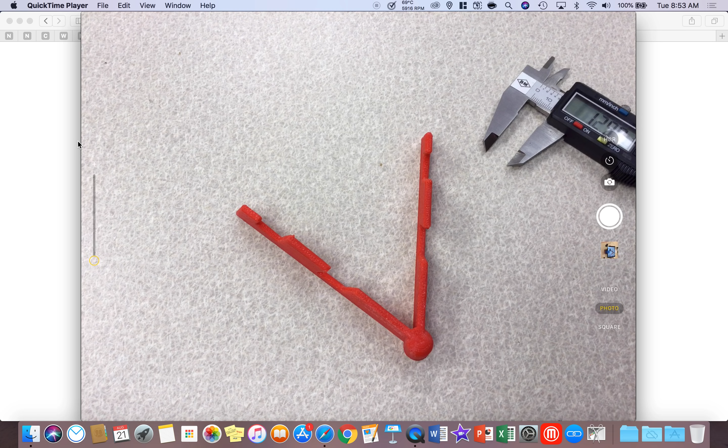Hello students, I'm going to give you a little bit of hint today on how to finish this project. So you and your partner are going to learn how to measure with the digital calipers and also how to draw your cell phone stand, to the point where I'm going to leave you about halfway through the project.

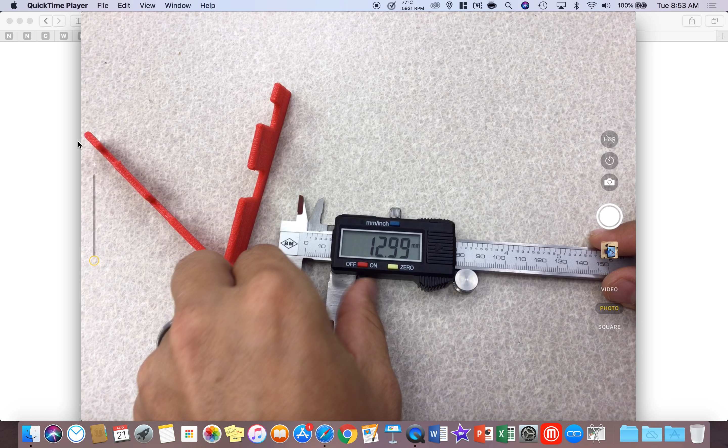The first thing you need to do is make sure your digital calipers are zeroed. If you don't see 0.00 or 0.01 when you squeeze on the jaws, then you're definitely not going to measure correctly because everything you measure will be off. Also, make sure you're not in inches and make sure you're in millimeters. So again, make sure you're zeroed and you're in the correct measurement.

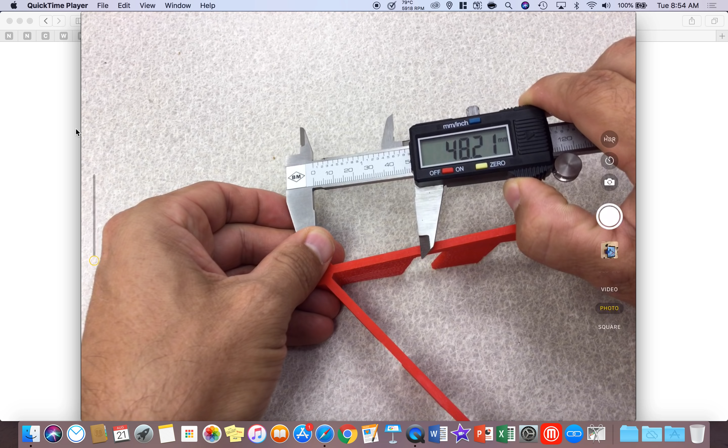Your first step is to figure out what is the length from here to this end point down here. So what we're going to do is flip it over and measure with the calipers. I'm going to put the calipers right here in the center of the cylinder. Here we go, and I'm going to hold it. Now this is where your partner could help you. I'm going to come out a little bit more, and it looks like 115 millimeters. So we now know both arms are 115 millimeters.

All right, next thing we need to know is what's the distance from here to here. So I'm going to gently push the top teeth in, and you can see that it's probably 105 millimeters. So that's good to know.

Last thing we need to know is how thick this is. So I'm going to pull in the inside jaws, and I think 3.75 is a good number to go with. So now in Onshape, what we're going to do is sign in.

Now I'm signed into Onshape. I'm going to go create a new document. Call this cell phone stand project, and then your name, and I'm going to hit enter. Cell phone project, here we go. Let me do something really quick since it grayed out. All right, there we go.

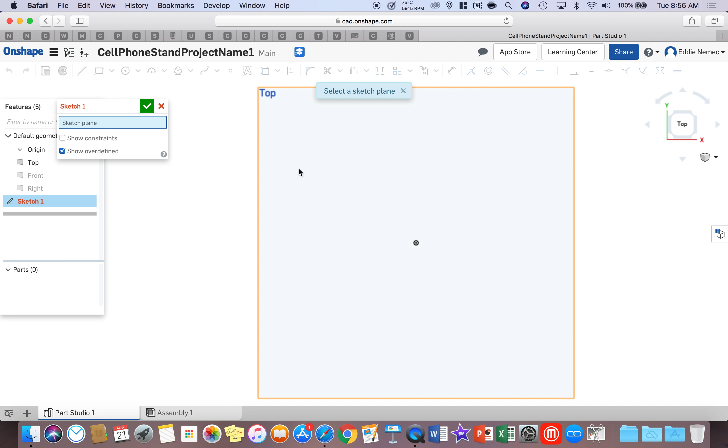Now immediately go to the top of the cube and left click on the top, and then bring your mouse over to where it says front. What you're going to want to do is left click on the eyeball on front and left click on the eyeball on right. That will now make you only have one plane to look at, and it's easier. I'm going to left click on the top plane. You're going to left click on sketch, bring your mouse inside the top plane and left click. You should see sketch 1.

So we know the arm is 115 millimeters. We're going to take a line tool and left click on the origin when we see that this is tangent to the origin. Left click, then bring your mouse down and left click. Now we have a problem.

This is in inches. So you need to go back to the 3 lines in the top, change your workspace units to millimeters. You're going to left click on inches, left click on millimeters, and hit check.

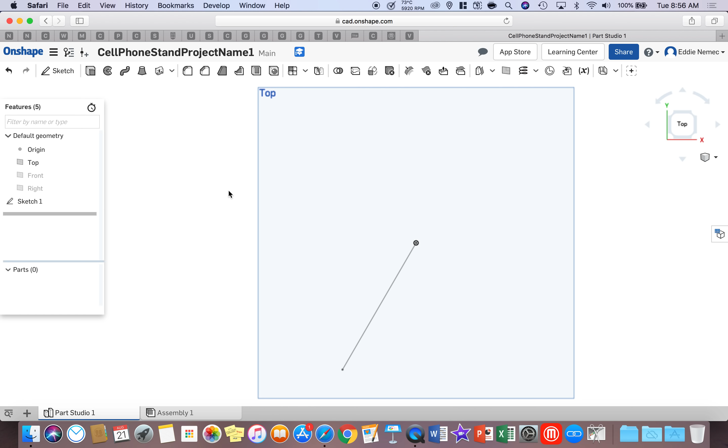Now anytime you want to work back on this sketch, go over to the menu, right click, and say edit. Now we're back in the edit mode. You're going to left click on dimension, left click on the line, bring your mouse out to the left and left click. Type in the number 115 and hit enter. So now we have 115.

Now what we're going to do is come back to our line tool, left click on it, it should be gray, left click on the origin when we see the tangent symbol, and bring our mouse out to the right and click. Immediately type 115 and hit enter without touching another button.

Now what we're going to do is right click escape line, and in order to keep these lines where they are and not have everything shift, I'm going to draw another line in the middle. I'm going to left click and come down, making sure I have a straight line, and left click. I'm going to right click escape.

I'm going to go to the dimension tool and left click on the center line and left click on this arm, bring the mouse down and left click. I'm going to go ahead and type the number 30 and hit enter, and see it slightly move the arm out.

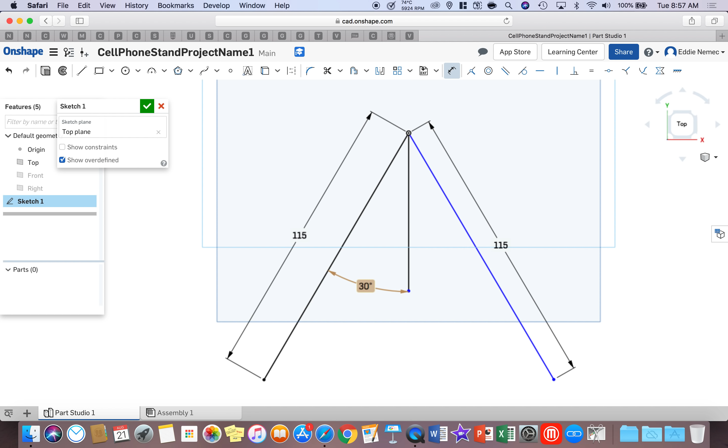All right, I'm going to do the same thing here. I'm going to left click on the center line, left click on the outside line, bring down my degrees and left click, and type in 30 and hit enter.

Now you can see that I've got the arms adjusted. What we need to know is what is the distance currently from this dot to this dot. So I'm going to left click on this dot and left click on this dot and come down and left click. Then immediately bring your mouse up, right click and escape.

We do not ever want to touch that number. So we're going to come to the degrees and change it to 27 and hit enter. I'm at 104.418, so I'm very close to the 105 millimeter distance I measured earlier. So I'm going to go 27.15 and hit enter, and I'm very, very close to the 105.

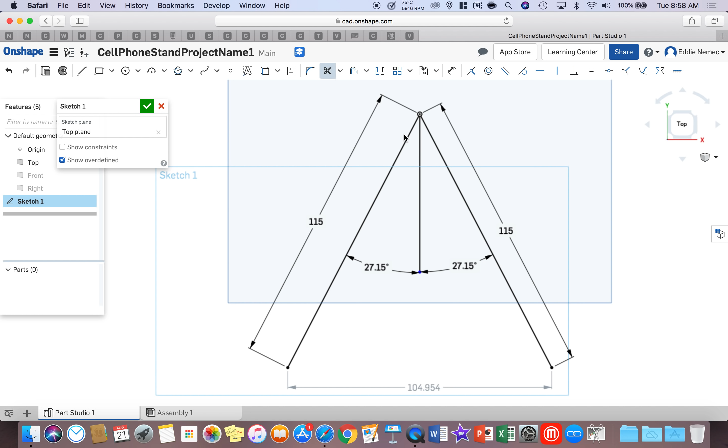I'm okay with that. Now what I'm going to do is I don't need this line anymore, so I'm going to go to the scissor tool, left click on it, and delete it. I'm going to right click escape.

Now I measured it with the calipers to be 3.75 millimeters thick. So all you have to do is go to your line tool, and right here on the dot, you're going to follow this line when you click. I'm going to left click and follow this line. Notice it shows you the right angle symbol - that means it's 90 degrees when you're right here. I'm going to left click and immediately type 3.75 and hit enter. Right click escape.

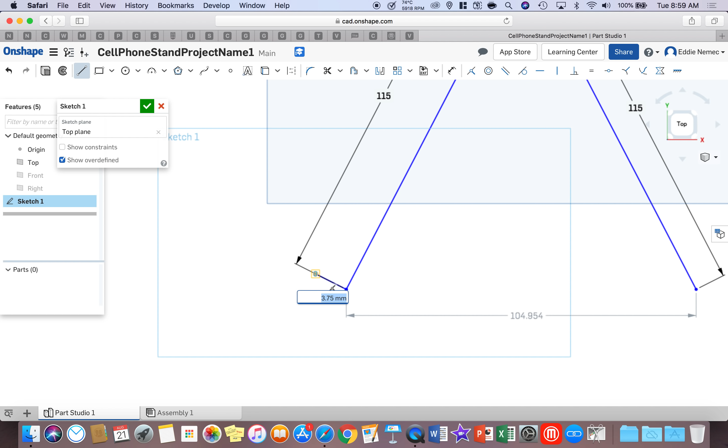I'm going to do the same thing on the other side. Left click on this dot, follow this line, left click and type 3.75, hit enter.

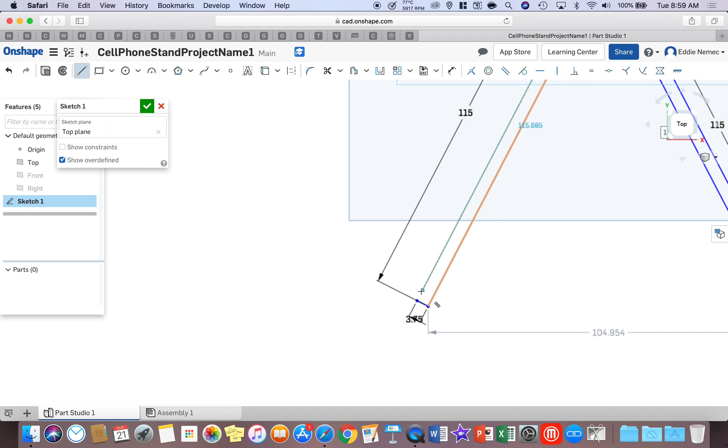Now stay in the line tool, make sure you are parallel. You see how it automatically highlights the line telling you are parallel? Keep that. Go all the way up until you see the dotted yellow lines that tell you are perfectly in line with the origin going straight up, and I'm going to left click. Then I'm just going to bring down my line and connect it with this endpoint and click. Now I have a solid shape.

I'm going to right click, escape the line, and go extrude in the top left corner.

Now I need to determine the height of the cell phone stand. So I'm going to go back here and take a look at the camera. Find the highest point, which is right here. You need to measure what the height is from here to here. So all I'm going to do is take the calipers, move them out, and it looks like 32 millimeters is a good number to go with.

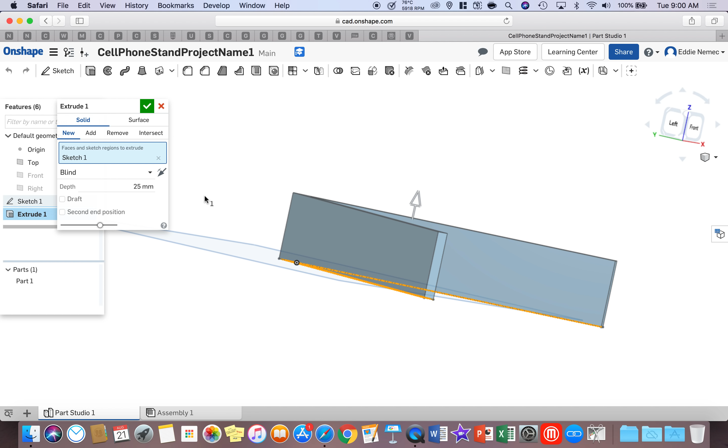So now what I'm going to do is go back in the program, and now I know to extrude to 32 millimeters, hit enter, and then hit check.

Now the last part of the project is you have to trace and measure at every endpoint and draw the cell phone stand arms on this side, and you got to do the same process on this side. Now one little caveat: after you draw on the outside, you actually have to do a new sketch on the inside and use the project tool to project the lines here, and you want to extrude outward. So I'm going to demonstrate that for you on one side and go halfway through the project so you can be ready to do it on your own.

So I'm going to go sketch, click on the face on the outside, and you can see I'm now drawing on the outside of the cell phone stand. Now what I need to do is go back to the cell phone stand and figure out where the height of this point on this face is, and where the distance from this point to the endpoint is. So let's get those measurements.

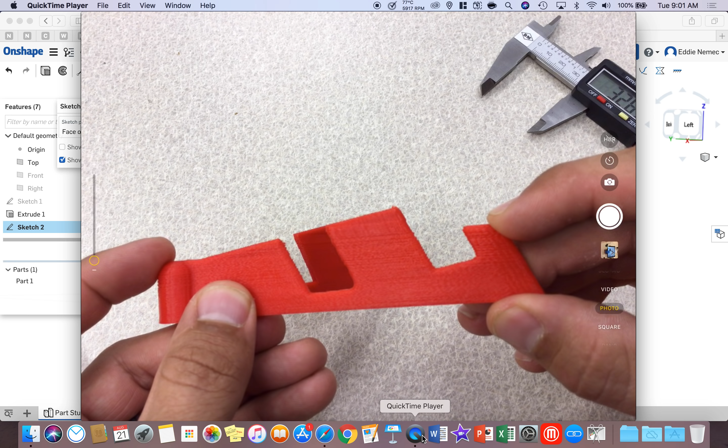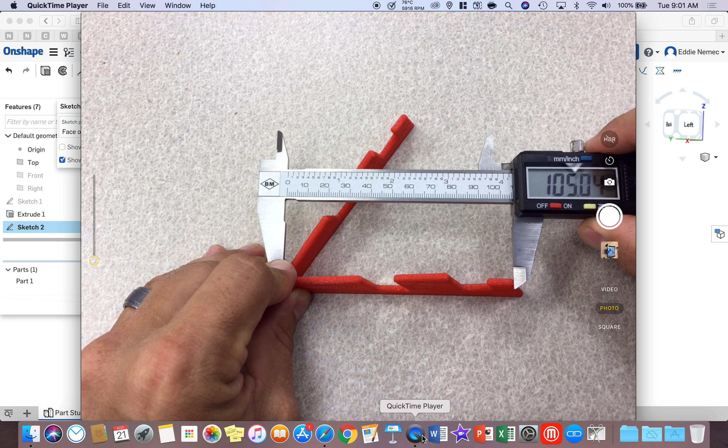The first thing I'm going to measure is the distance. All right, so let's go here. Let's put our digital calipers right about here in the center of that cylinder. Bring it all the way out, and then bring it up to that face. And it looks like not that, because I'm not in the center. Hold on. Here we go - 105 millimeters looks perfect. See how I'm in the center of the cylinder and I'm on the edge of the face of that?

So now I'm going to go into the program, and I'm going to go to the line tool, and I'm going to left click on the bottom point and bring it up and just left click.

Immediately draw a straight line all the way across and left click on that line. Now go to your dimensions, left click on this line and say this needs to be 105, then hit enter. Now that brought that in.

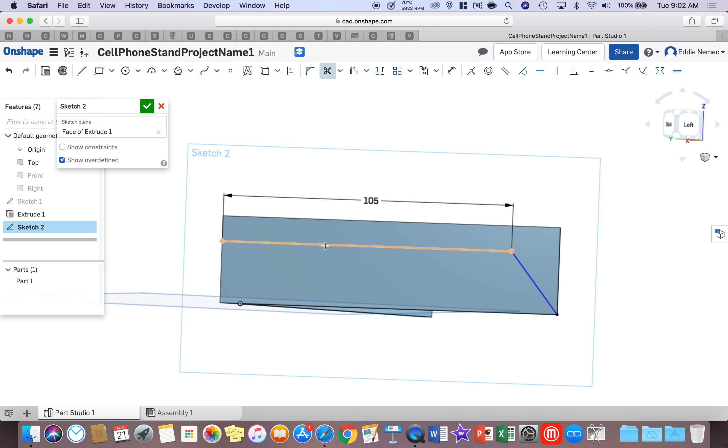Now what I need to do is go to my scissors tool, left click on the scissor tool, left click on this line and get rid of it. So we just used that line to pull the line where we wanted it to go.

Now I'm going to draw another line. I'm going to left click, go straight down, make sure it's straight down. You got that symbol and it's tangent on the bottom line, and left click. Now what we're going to do is figure out the height.

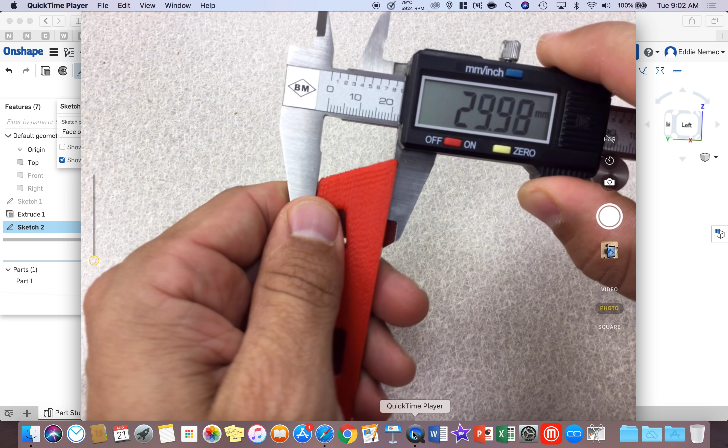So I'm going to go back in the video and measure the height, and simply do this. The height should be, looks like 24 millimeters is a good number to use, because I'm going to round up. So I'm going to go back in the program and type in 24 and hit enter. I'm going to right click escape, and now I've got that line up where I want it.

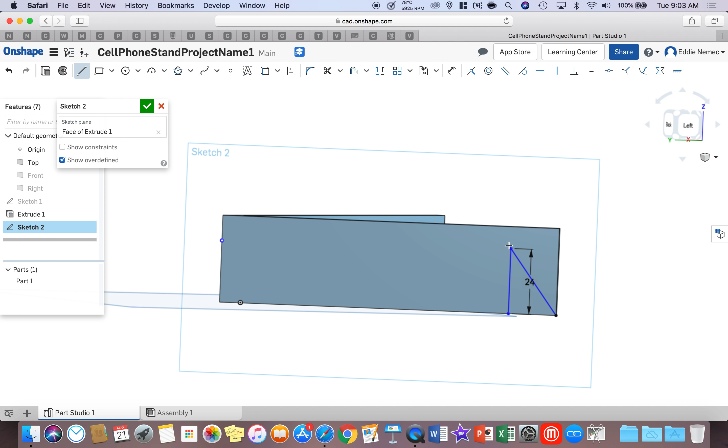Now what I need to do is figure out what's the distance this way. So what I'm going to do is draw a line, left click on this dot, go straight and click - it's a straight line. Now I'm going to go back in the camera and figure out what's the length of that line.

Looks like 12.5 millimeters is a good measurement. So here we go, I'm going to type in 12.5 and hit enter. So now I've got that line.

Now what I'm going to do, and this is important, I'm going to touch this line and bring it back. It's parallel. I'm going to left click. I need to know how long that line needs to be, so to do that I'm simply going to visually measure and figure out that distance.

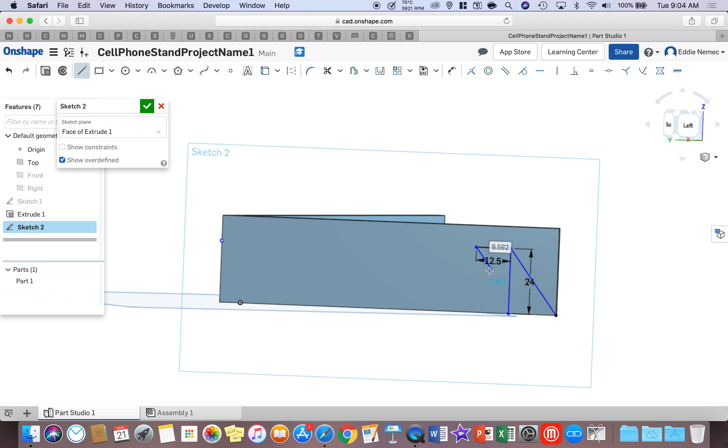And it looks like 10 millimeters is a good number to go with. So I'm going to go ahead - I've already clicked, so I'm going to type in 10 and hit enter.

Now what I'm going to do is right click escape line, and I'm going to clean up some of this. I can go to my scissor tool and left click on this line and get rid of that. So you can see we're already making that front piece of that arm look right.

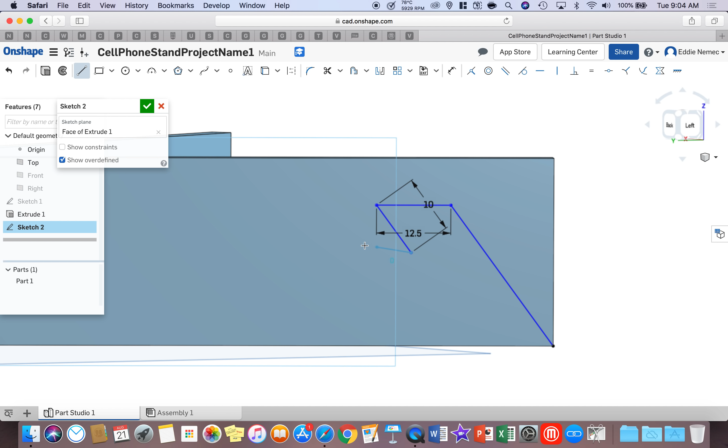Now I'm going to draw a straight line across like so, and I'm going to left click. Go back into the video, all right? Let's figure out with the inside teeth what that dimension is.

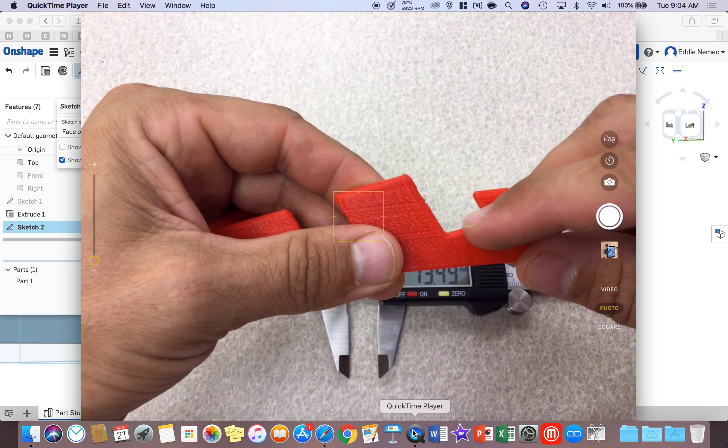So it looks like 13.5 millimeters will work. Now this is important - if your phone doesn't fit here because of the case, make this line longer so your cell phone can fit in here and measure it with the calipers.

So here we go, I'm going to go back in the program. I'm going to type in 13.5 and hit enter. And then looking at the cell phone stand, you can see that these lines look parallel.

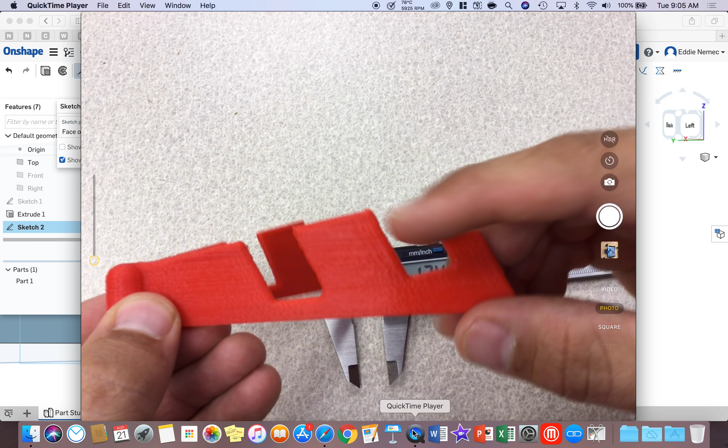That line and that line look parallel. This line and this line are parallel. This line and this line is parallel. Everything's parallel, so that's easy.

So now all you have to do is match up with this line, bring it over till it clicks and tells you it's parallel, and come all the way to the top and left click when it's tangent.

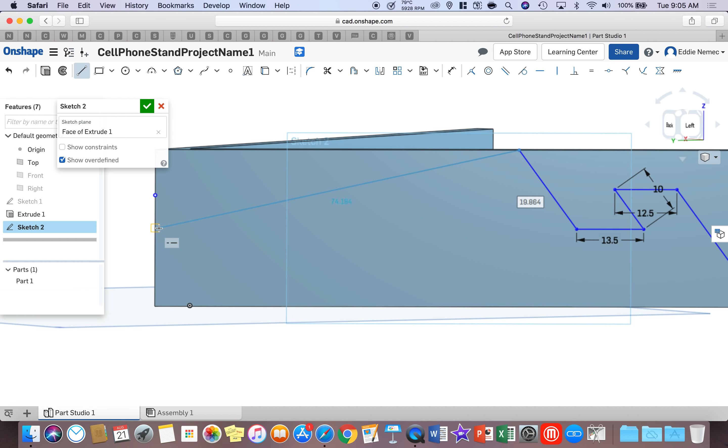Now we're almost done. I'm not going to show you how to do the inside one - that's on you. But what I am going to do is show you how to come over here and find the height of the end of the cell phone stand and make a line there and then finish it.

So I'm going to right click escape line, and let's figure out what the height is over here. So I'm going to go back in the video. I'm going to find the height of the bottom part, and it's 20 millimeters.

Easy peasy. So now what you're going to do is draw a line down here in the bottom left corner and go straight up, following that line and making it tangent, and type in 20 after you left click - there's our height. And then I'm going to trace a line all the way to that end point and left click.

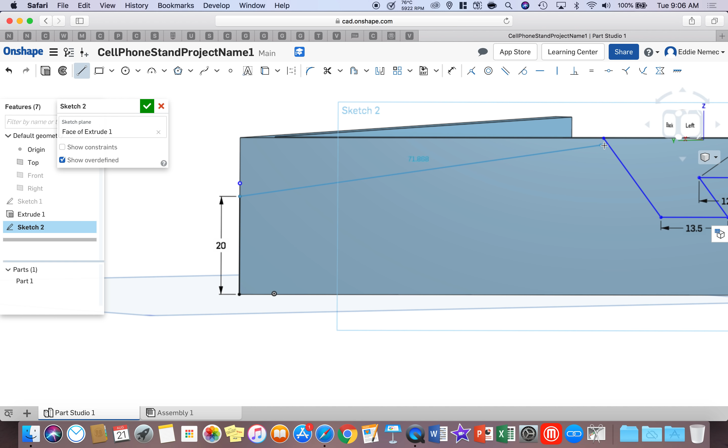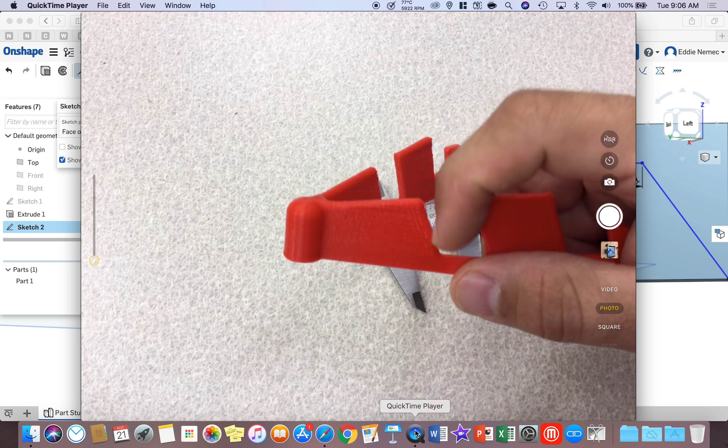So now this kind of already looks like the face, except you're missing this, and I'm not going to show you how to do that. That's on you and your partner, and you have to finish the other side as well.

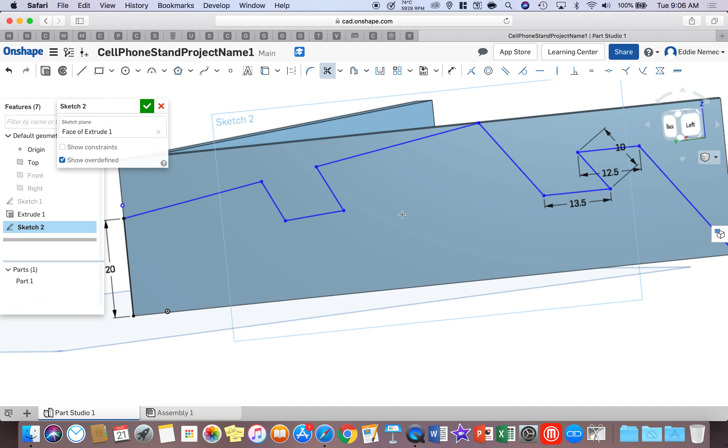I'll show you this. After drawing that line, you can draw another line - I'm just making this up, and I'm not even doing it right. Then I made the outline there. I can take the scissor tool and get rid of this. Okay, this is wrong, please do not do what I just did. Then I'm going to hit the check box and finish that sketch.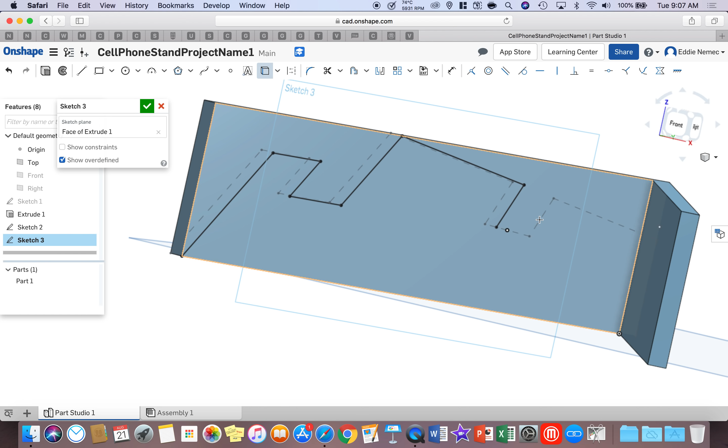Now on the inside wall, rotate and go to sketch, left click on that inside face. Then go next to the letter A to the use tool, left click on it, then left click on each line as it highlights yellow. Now you can see I'm retracing everything I did on the outside wall onto the inside wall. If you don't get the line, make sure you click it, because I messed up.

Hit check, and now left click on each one of these faces on the top - do not click down here - and hit extrude in the top left and say remove. You can see it removed everything, and hit check.

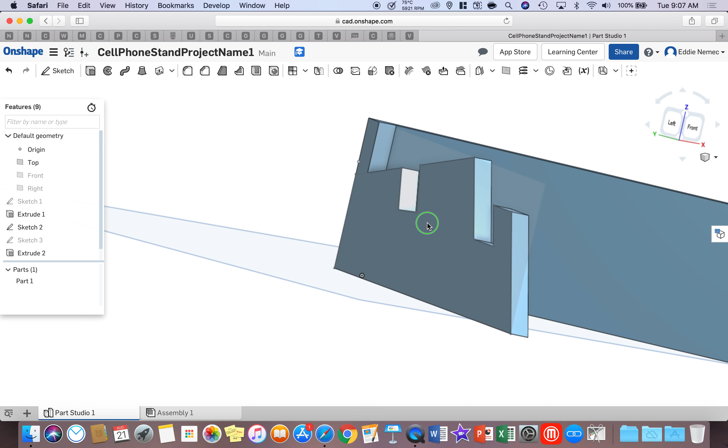You will immediately do the same process on this face, draw it, then project it on a new sketch right here, extrude outward. Then come up to this top piece - it's simple. Click on the top of this piece, left click, and go extrude, then go remove, and say up to face.

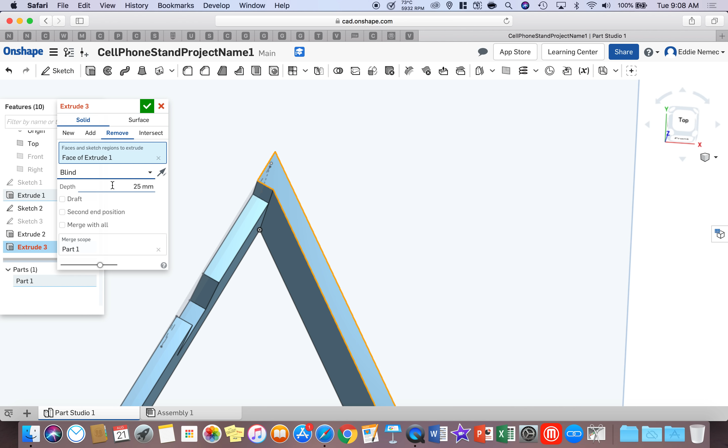Well, actually, we know the number, excuse me - go blind, and type in 20 and hit enter. That will put that down exactly where you want it. Now, I didn't finish the sketch, so please understand that's going to look different, okay? What you'll see when you do this is that it will come down further after you extrude it.

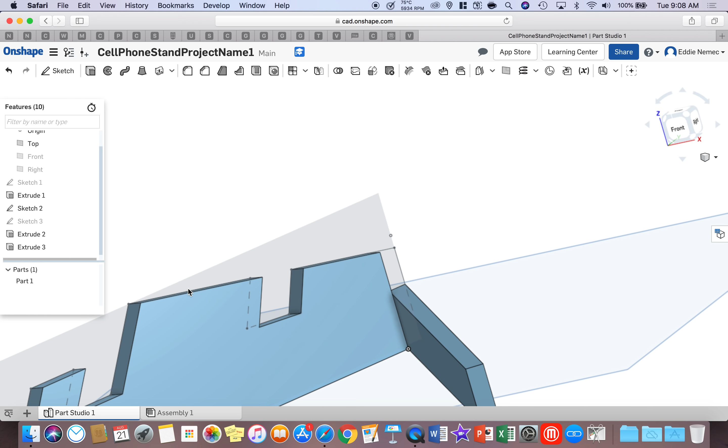So I'm going to go back. Now, what you're going to want to do is make sure you and your partner accurately measure these endpoints and find out where they need to go so you can do what you need to do.

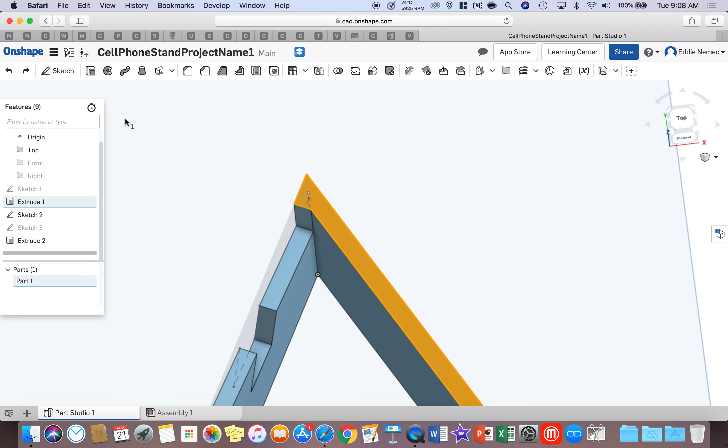Another trick, by the way, let me do this since I didn't finish it. I'm going to left click here on this face and go extrude, remove, and then I can always go up to face and left click right here. It will put that face exactly the way you want it down, okay? So that's probably the better way to do it than doing the 20 on the blind. I apologize for doing that.

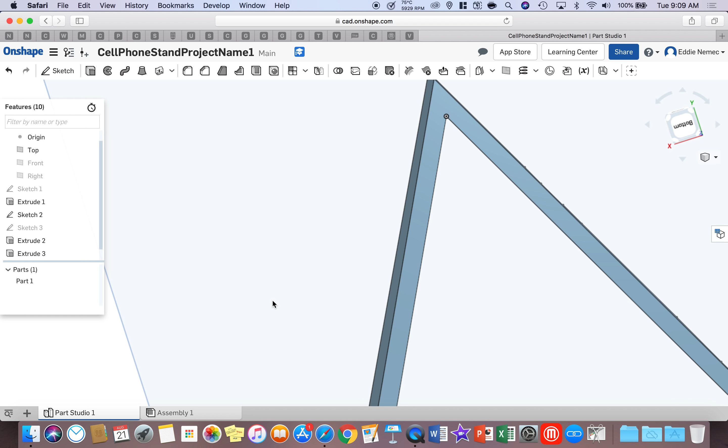Then hit check. On the back side, the last thing you need to do is - let me get this oriented right - draw a cylinder right here. So go to sketch, left click on this face, and draw a line from the origin straight down to the bottom, left click.

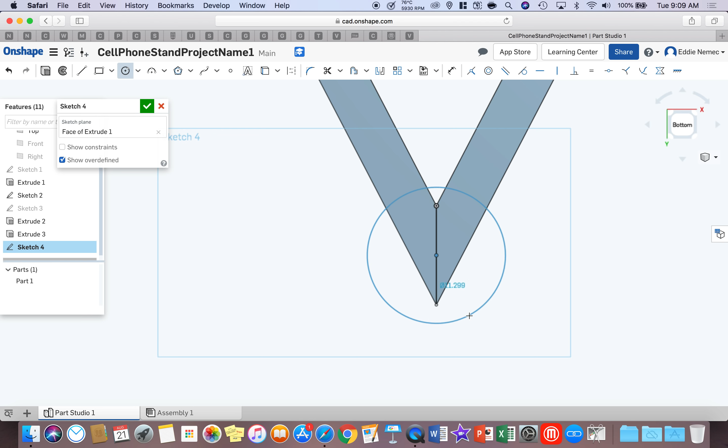You're going to go to your dot tool next to the letter A and trace this line until you see the midpoint, left click. Then go to your circle tool, left click on that dot, and start building a circle. Now you need to know the dimensions of that circle, the diameter.

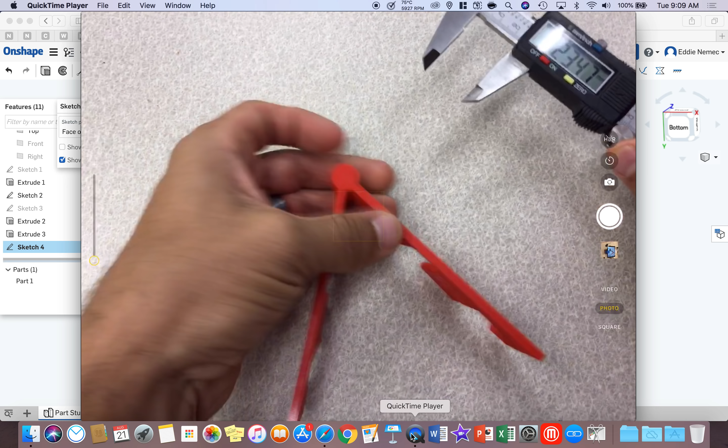So we're going to go back to the camera, and all you have to do is take your digital calipers and put them around the cylinder. I'm not going to do it - it'll tell you the diameter when you clamp down on it like you do here on the face. But I'm going to make one up in the program just for the purpose of showing you.

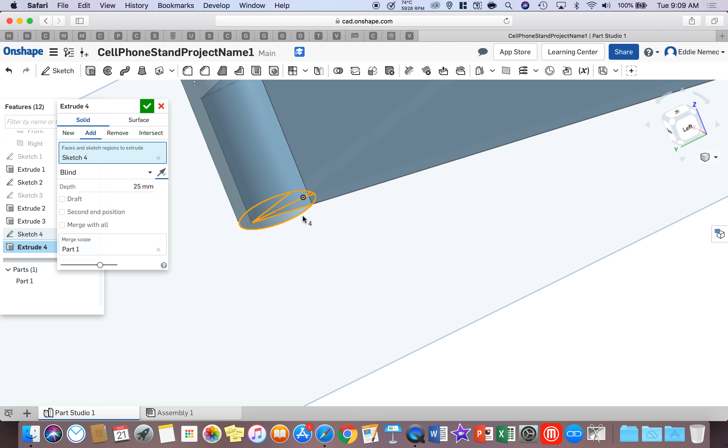I'm going to click extrude. Now it's going the wrong way - all you have to do is click on this arrow to put it the other way. Then go blind, check up to face, and left click on this face, and it should look great, okay? Now I didn't dimension it.

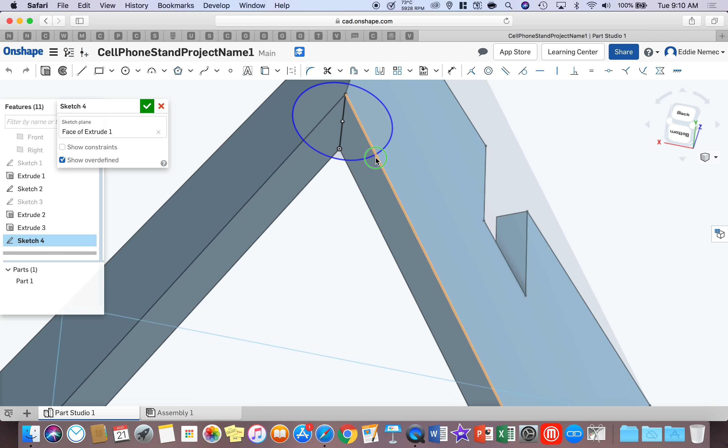So if you want to dimension it, that's very simple. All you have to do is take your dimension tool, left click on the line, and you can type in a dimension - 15 is not the right dimension, so please do not do that. And I'm extruding it, then I'm going to go up to face, click on the face, and hit check. All right.